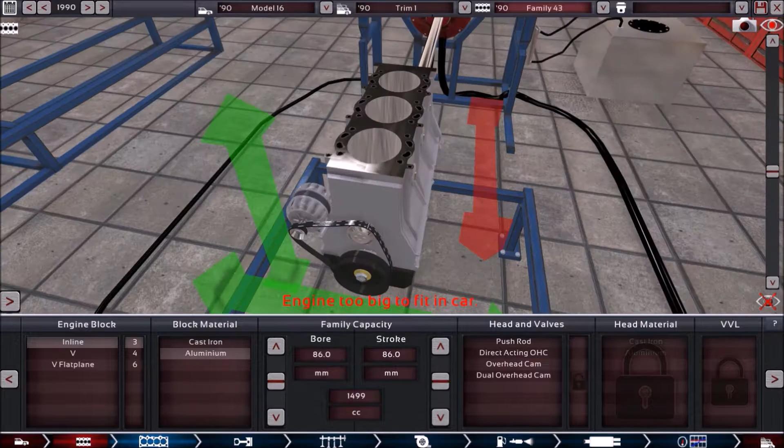And this thing is lagging like mad. Okay, we don't want an inline 3. Too small.

Inline 4. Oh. We may be running into slight problems.

The MR2 at about 2 litres. We have to deal with something tiny because of size constraints. We can use the stroke though, and that'll give us a slight improvement in capacity. There we go, 1.5. That's not too bad.

It will actually let us fit a 1.5. Yep. Looks like 1496 is about the limit, which is close enough to 1.5 for me to not really worry about it. I don't think we should need a turbo then if the engine is this capacity, which is good.

We'll go with 5 valve per cylinder to compensate for our lack of capacity. Just throw money at a problem until it goes away. That's our company's philosophy.

I have done a quite nice engine here though, I think. Now the colour. Oh yes, that one. Kind of retro design, I like it.

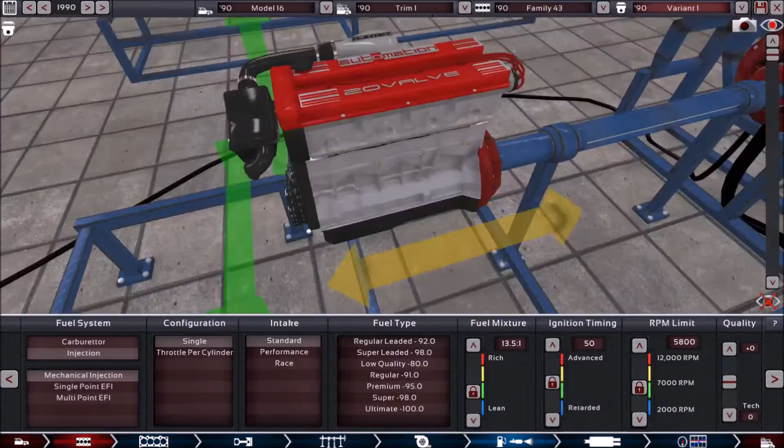Naturally aspirated. In this case, we might do a turbo later. It would always be possible to turbo this engine. I think it's strong enough in terms of head design and stuff to cope with it.

And I think we'll use good old mechanical injection. Simple and easier to work on. I say that as we've gone for 5 valve per cylinder.

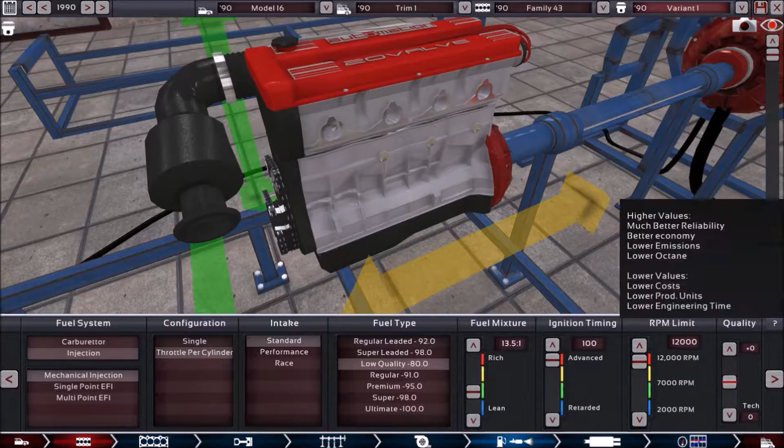But anyway, wanted to run on low quality fuel, I think, so we can go with alternative biofuel and stuff without the engine exploding. Since those fuels can sometimes be worse for your engine, so it's best to just compensate for that.

I think we can make the power we need anyway. Worst case of all, we'll have to go for a turbo. I might actually put a turbo on if I can come back and do it relatively cheaply and still keep the car reasonably priced. We'll just have to see though.

This stuff generally, the airflow isn't good on either of those two, so I'd have to have an excellent airflow catalytic converter. As long as it keeps emissions down, it's doing its job.

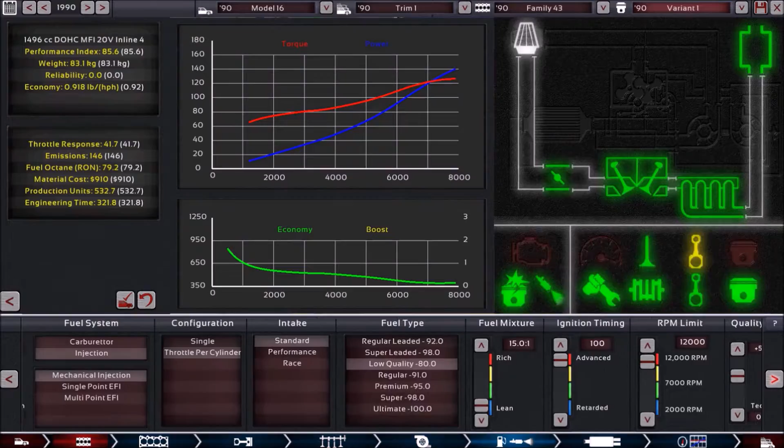So we just need to do a basic ordeal here. And what am I doing, eh? I've not even tested the engine, it won't tell me how much power. 142, decent start.

And then we'll just turn that down until it doesn't explode, which is really low revs actually.

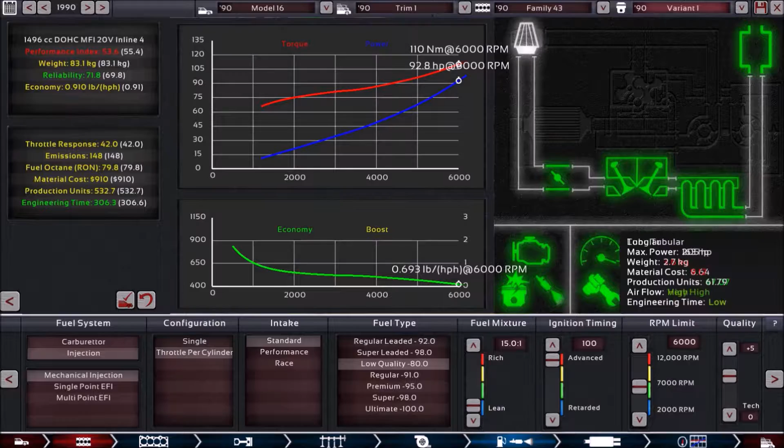Okay, I think I need a serious engine change. But for now we've got a working engine. I'll probably design it smaller with a bore bias and then turbo it. Either way, we've got an engine in the car.

And we need to add other bits, like the 5-speed manual. It hits 99.

That is just a punch in the face to various car manufacturers in the 30s and stuff who wanted to hit 100. Like, look, my car hits 99. To be honest, I'll probably like it, less competition.

Okay, so what's better in terms of differential? Viscous is apparently better for comfort, despite its name being vicious. Okay, so we'll have to do that. It has to be reasonably comfortable, even if it is a sports car.

So we can go with 225s, front and rear. I'd have liked for more, to be honest. Looks like 16s are about our limit, as far as tyre widths are concerned. They're decent tyres though, I just wish for better.

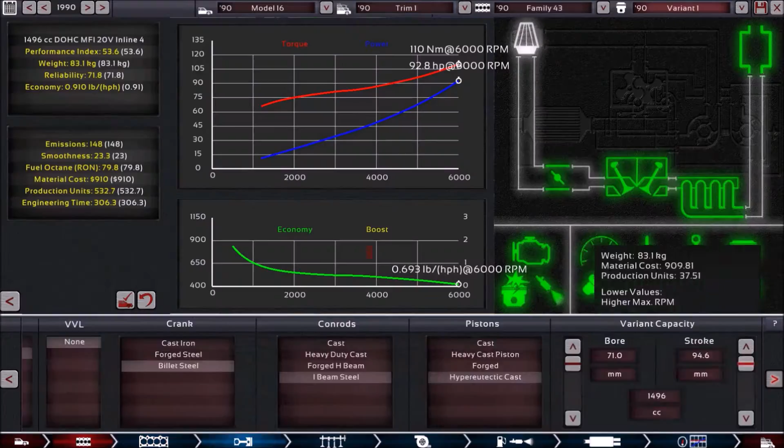I'll settle for 235 as long as I can go with better tyre compounds. I know it's not perfect, but that's the body we've got in our car. The only alternative would be making them tiny, but even so that doesn't work.

17-inch wheels are actually quite large. I mean 16's quite large for the time. Those wheels look too small.

Okay, so this is what we've got now. Need to choose some wheels though that don't look horrible. Honestly, I think they work. It could actually do with 17s. It would look better, but functionality is a problem in that. The tyres have to get narrower as a result, and we really don't want that.

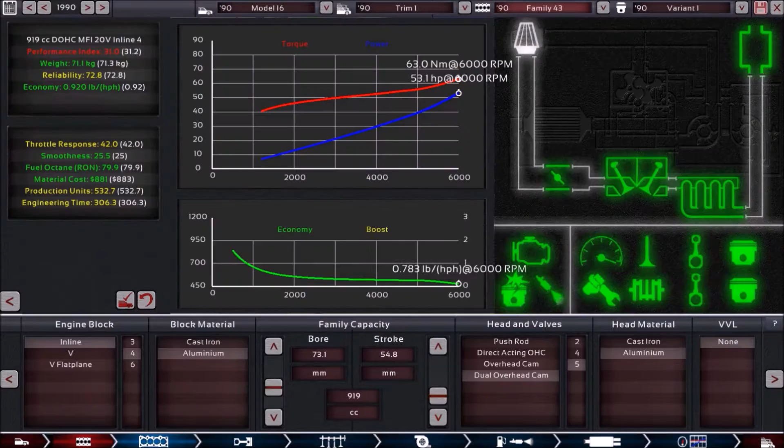I'm guessing the only market advantage we can have over the MR2 at this point is selling it as a quicker vehicle with the turbo. Since I've designed it to handle a bit more power, I think we can do that. We're making the engine smaller though, since having it set up for stroke wasn't doing any good in terms of RPM. A smaller, lighter engine should be good. Add a turbo to that.

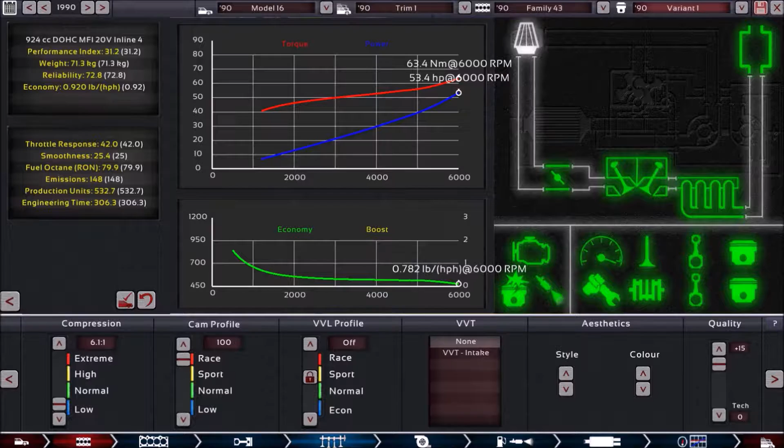Could save a bit of money on the engine by cheaping out on stuff. Also variable valve timing, that's good. We want all the fancy stuff here just to make sure it can keep itself cool, even though it's going to cost a lot of money.

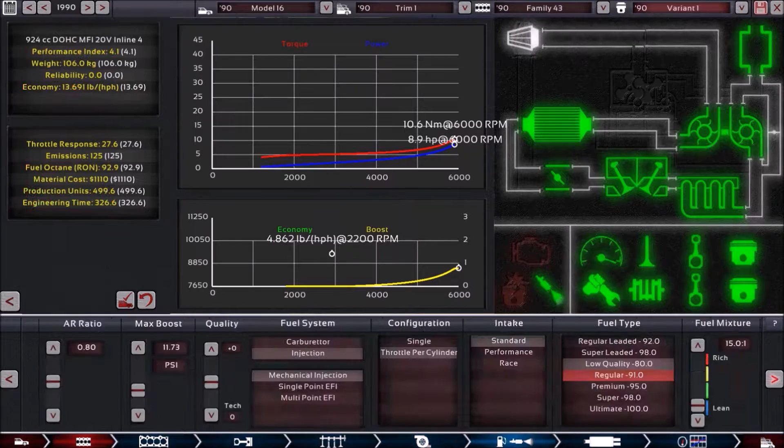I don't think we really want to mess with these qualities, to be honest. Just leave them on 0. Maybe it's not good for the vehicle, but we need to keep the price down.

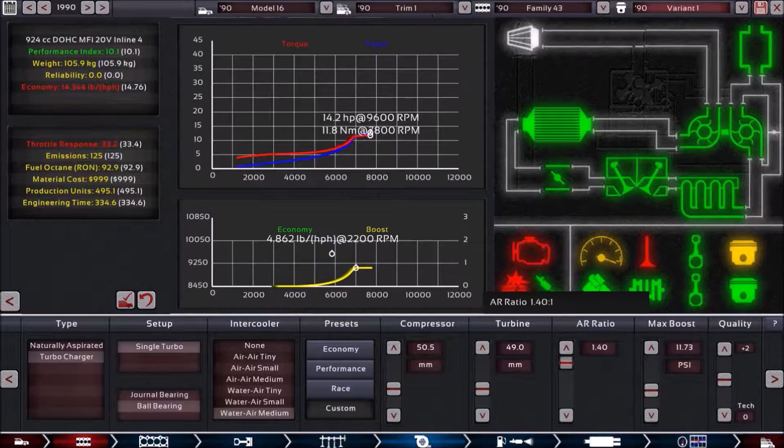Okay, so we'll try adjusting the AR. That just increases lag, it seems. I need the point where it jumps and gives me loads of power. Having 0 PSI is apparently good for it. How doubtful am I of that? We need loads of boost and stuff.

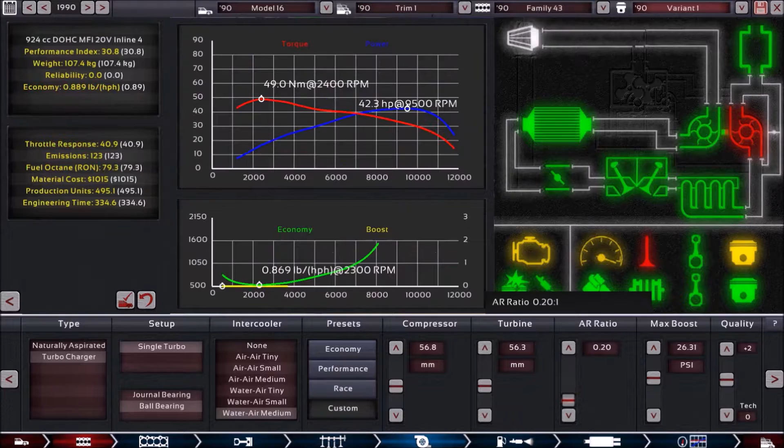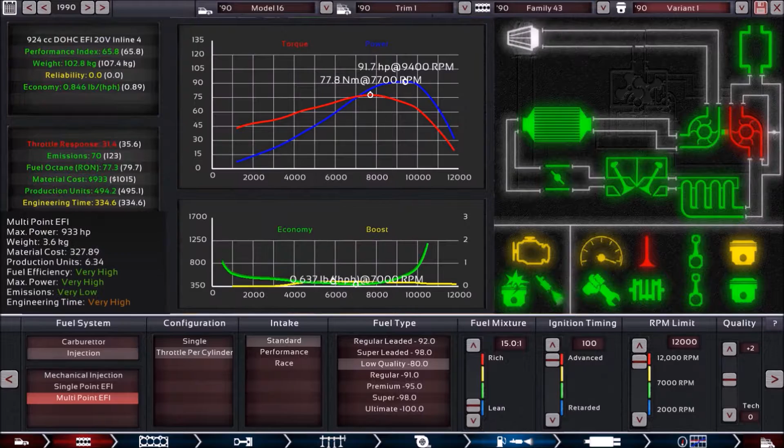Right, how much power do we want? I don't know. Well, we are running on low quality fuel. Does that defeat our chances? Try multi-point electronic injection, I guess.

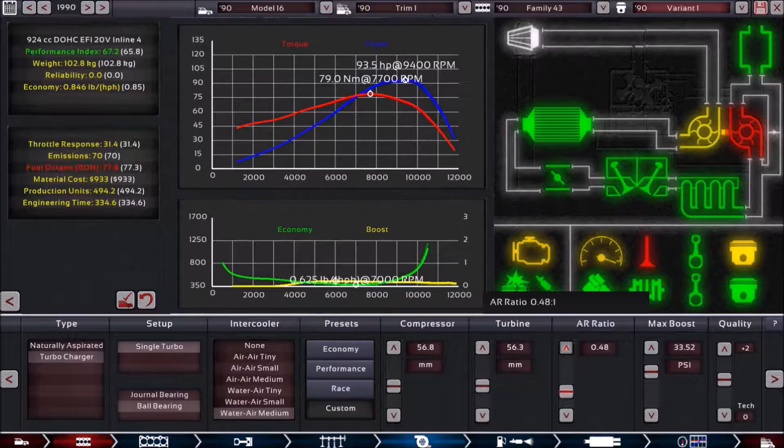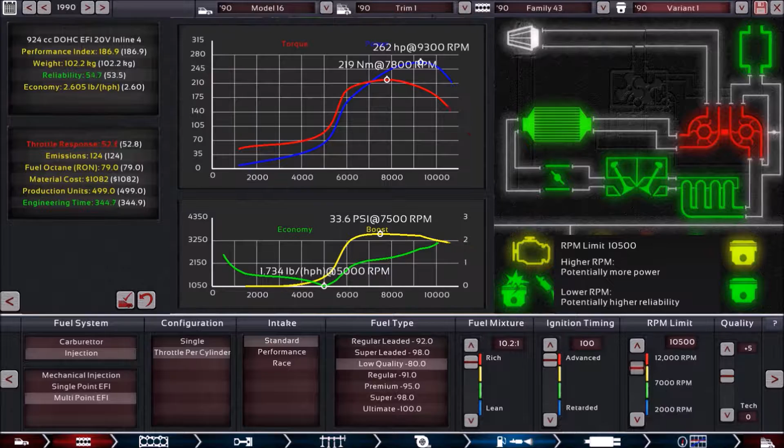Okay, so I'll return when I've adjusted all of this stuff, since it'll take a while. Okay, so I return with a pretty poor engine actually in terms of economy. Yeah, 2.6. By no means is that great. I also have to readjust the red line, which I seem to have forgotten to do.

Yeah, I can get everything working though, which is good. 10,500 seems to be the limit, which is actually quite a high revving engine. Do we need that? Yep, we do. So I've done that, as you've seen.

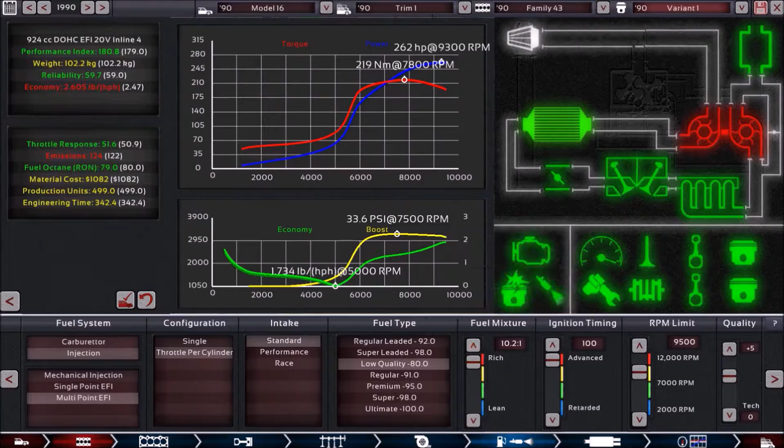I've had to adjust the fuel mixture to one higher than it really should be, and it destroys the economy, but hey, we made the power. Isn't that what's important? And here's the turbo. I don't need to run that much boost, but it doesn't really seem to have any negative effect if I do, so I'm doing it anyway.

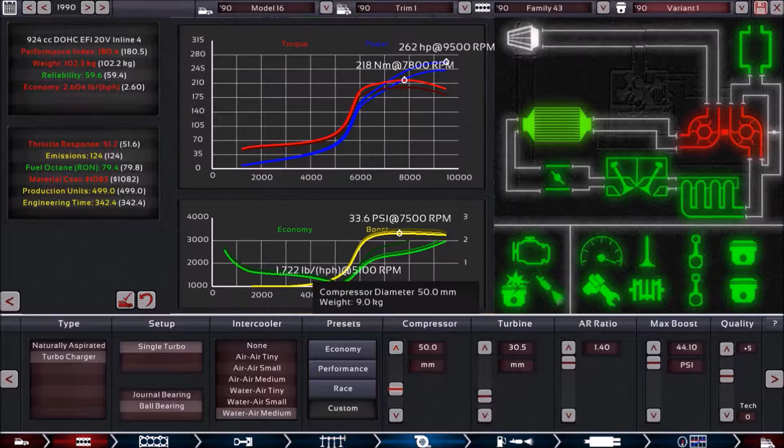There are the settings I've used. If I mess with those, the power goes down. Other than when it went up, which is interesting. I could spend so long messing with this, but I've got it working as I want it to. Yep, again, it's taxing the parts quite hard. How does it look? There we go.

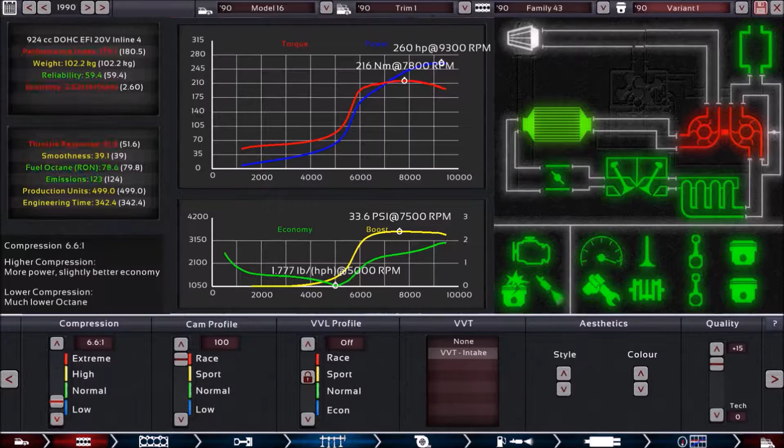Our little 1 litre engine. Or is it 0.9 litres? I'm not too sure. The compression is a little above the very bottom, but really it's not a high compression engine. And yeah, it's a 0.9 engine. So less than half the cc's of a Toyota, and we've made a lot more power. So let's see it run. There's a lot of lag also, by the way, to make this power.

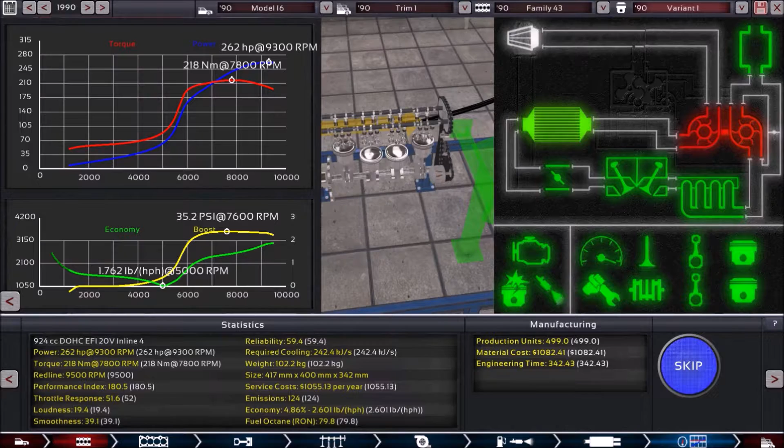There we go. It's also quite light, 102.2 kilos, but then you can probably see that by it being such a tiny engine. 6.6 miles per gallon. For the day, it is a powerful engine. I guess we have to respect that.

And what am I doing? Not really looking at the numbers as they change. Because of the lag, the acceleration is pretty poor. We can get 8.0 seconds. The MR2 I think is about 7.7, and it's naturally aspirated, guys.

Maybe we should have just gone with a V6. I don't know, but a V6 would have been heavier. 7.0. Right, I think if we can get 6.5 for acceleration, I'm happy. 6.4. Yes.

So there is our vehicle and our transmission. It's pretty slow actually, 6.4 0 to 60, considering it's relatively light and powerful. Well, at least we're not letting any cooling go to waste.

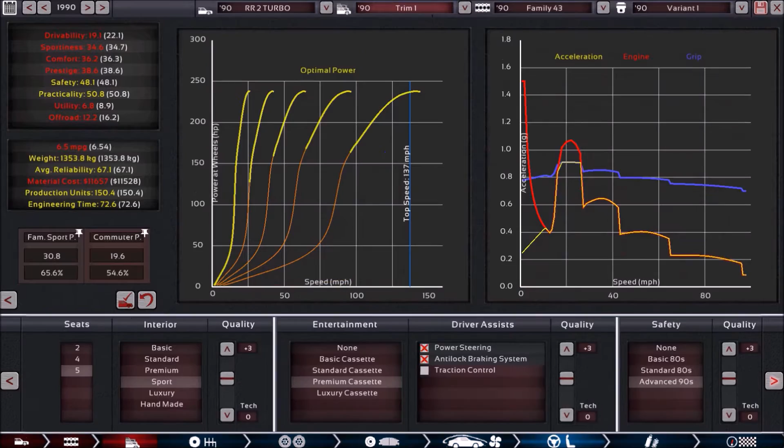And since we can't go with wider tyres, how else do we get the grip? Again, market's 31,400, so that's not increased the price by as much as one might have feared. There we go, 5% markup for 33,000. Not ideal, but we have got a lot of power here, even if it's in an incredibly inefficient engine. We've actually made it slightly lighter as well, I think.

Very slightly. Now, the downforce. We need to adjust that with our wing angle and stuff. Point nine front, we don't need quite that much. I think we need about the same on the front as the rear. We don't really want to push the front down too much, or the rear end could end up getting squirrely eventually.

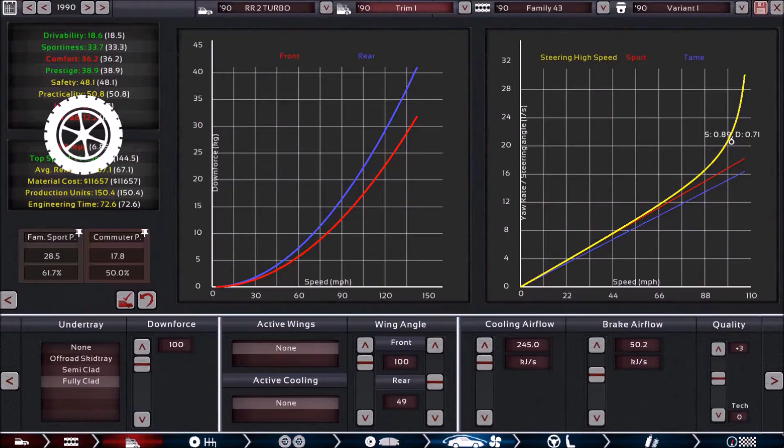Yep, we've only got 3 kilograms on the rear. Something needs to change there. Too much rear downforce. And there we go, 2.5 kilograms more on the rear, which are the driven wheels.

We need to adjust the suspension as well. I'm hoping with the white suspension it can just be incredibly firm on the rear and take everything. As a matter of fact, should I go with sport suspension? No, it's a GT. I'll actually call it GT Turbo, probably a more relevant name due to the suspension setup. Then we could have an R Turbo or something, which would be a version with race suspension or sport suspension.

Now, the test track, we have the Nürburgring. Yay. So just check the suspension again, I really want to make sure that's right, since the weight balance is not going to save anyone here. It's got something like 65% on the rear. I've lost it, but it says somewhere... there we go, 63.7 rear. About the same as a Porsche, really.

Let's take it round then, and I'll be back soon.

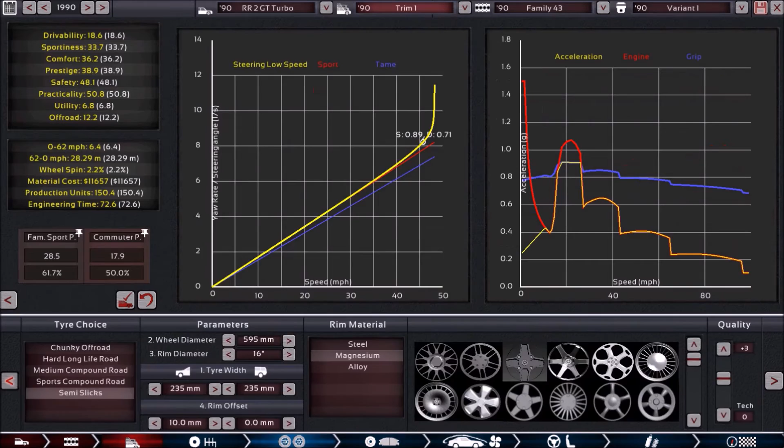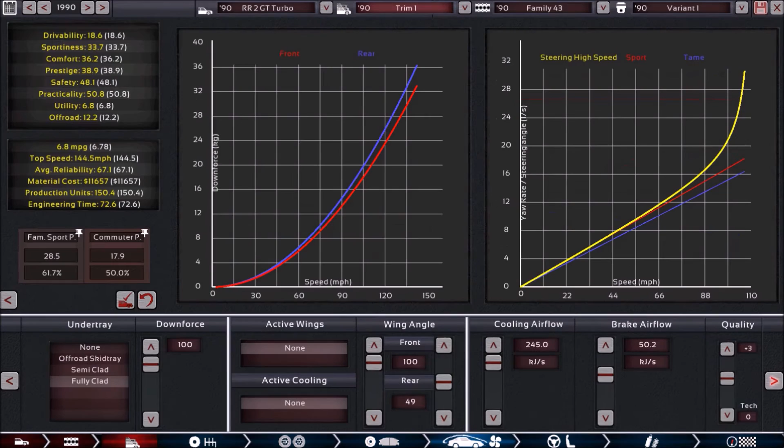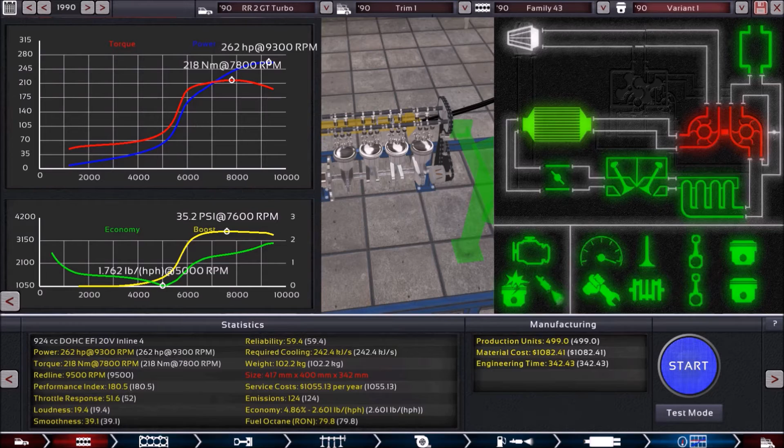You'll see my driver was trying to keep it above 6,500 RPM, it seemed that way at least, to keep it within the turbo band, and it was still slow. I guess it's just the fact that it's a 1 litre engine and such like. It's not very torquey, not real torque at least. Again, we need the power curve, but I've gone off it stupidly. You see, only 218 torques—that's not a lot to push it out of corners, especially when you have that instant traction of a rear engine layout.

But it's probably not much worse than a 2 litre in the MR2. It has to be said, on this website at least, most of the times are newer vehicles. I mean, the fact that it can keep up with a Chery, to be honest, I think is kind of impressive though. I know it's a Chinese car and things, but it's still a modern car with more modern technology.

So, I think I did okay, but I could probably have done a lot better if I actually chose a body which could fit a decent sized engine in and get decent economy. But anyway, until next time, goodbye, until another day.